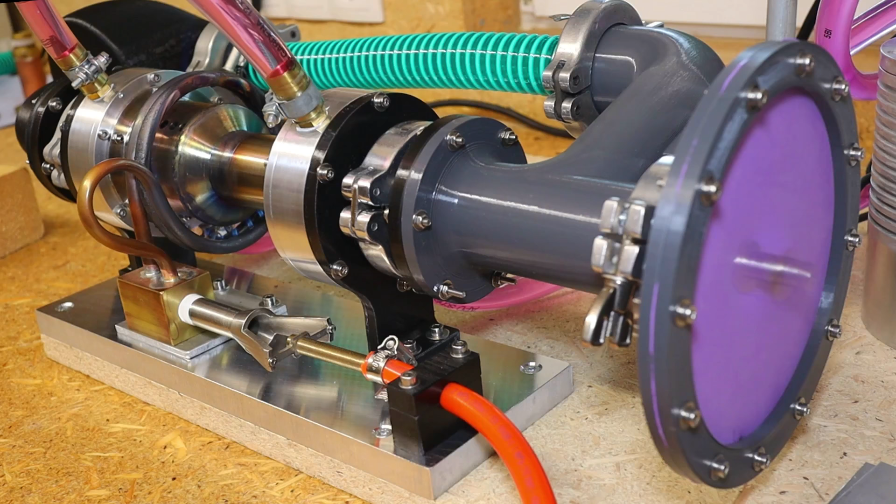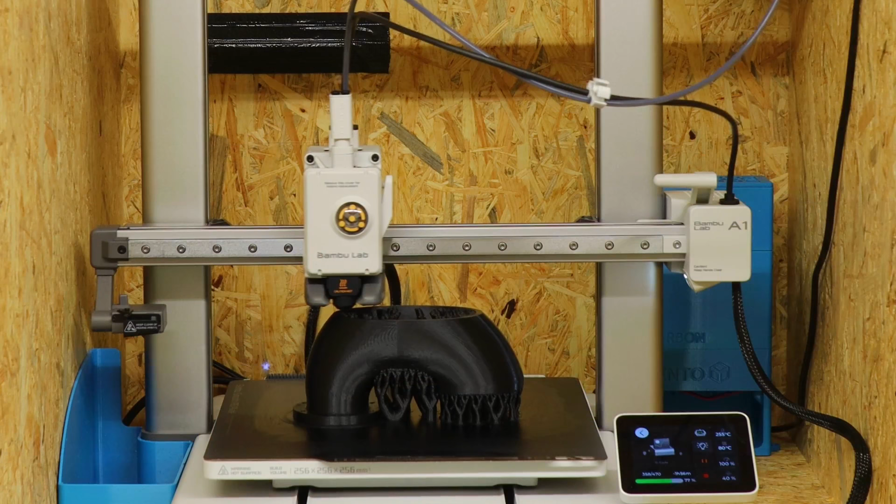The open source thermoacoustic Stirling engine has a very simple design and can use any heat source. It is perfectly suited for generating electricity easily and is designed so that anyone can build it. Almost all parts of the engine can be made with a basic 3D printer.

With this video, I want to make the last remaining metal parts accessible to everyone as well. All blueprints and 3D models are being released immediately as open source downloads. I run the thermoacoustic Stirling with self-produced biogas. This allows me to generate cheap electricity from our organic waste.

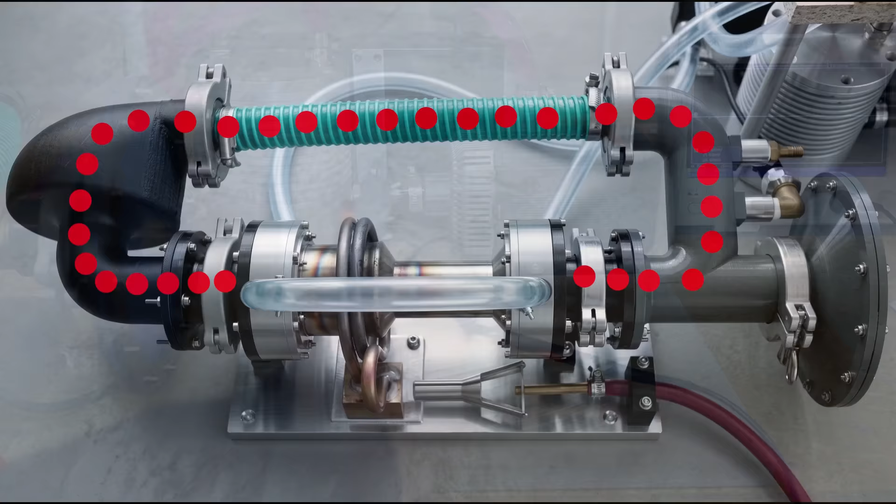The engine consists of the power core, the feedback loop and the power extraction unit. In the power core, the heat input creates an acoustic oscillation. This is amplified in the feedback loop and then converted into electricity in the power extraction unit.

Only the hot section, consisting of the heater, regenerator and thermal buffer tube, cannot be made from plastic. In this video, I want to present a first draft for metal printing and discuss it with you. The final design can then be ordered from a 3D printing service and you just print the rest yourself. I will explain exactly how it works after presenting my design, so you can contribute your hopefully many ideas and improvements.

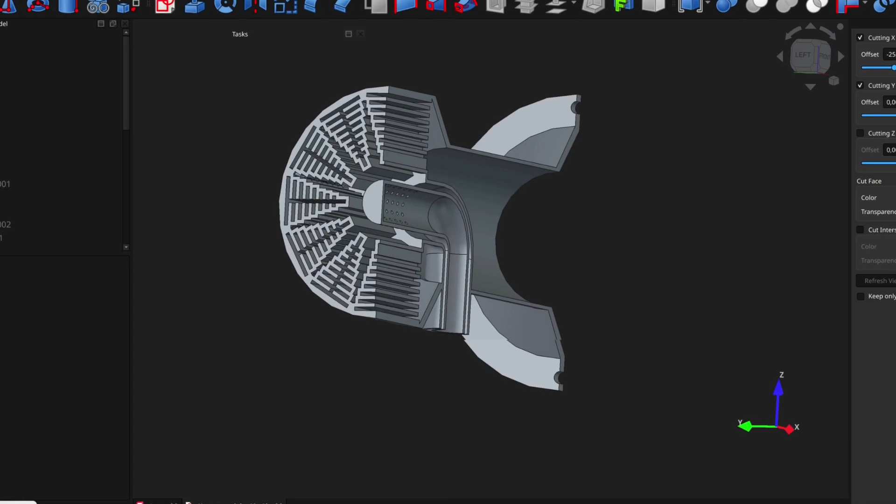The component made up of the regenerator housing, heater and thermal buffer tube is best designed as a single piece to minimize thermal conduction losses. With 3D printing design, you have complete creative freedom, and there are many ways to optimize the heater channels. To minimize heat losses with my biogas operation, it makes sense to integrate the burner inside the heater. This improves efficiency, but it makes the layout of the heater channels, the secondary air supply and the exhaust gas routing more difficult.

Together, the heater channels should have a free flow area of 900 to 1000 square millimeters over a length of 26 millimeters. They need to route into the 60 millimeter diameter of the regenerator housing and the thermal buffer tube without adding too much dead volume or flow resistance. Thin, rectangular slots have a better perimeter to volume ratio than round channels, which is important for maximum heat transfer.

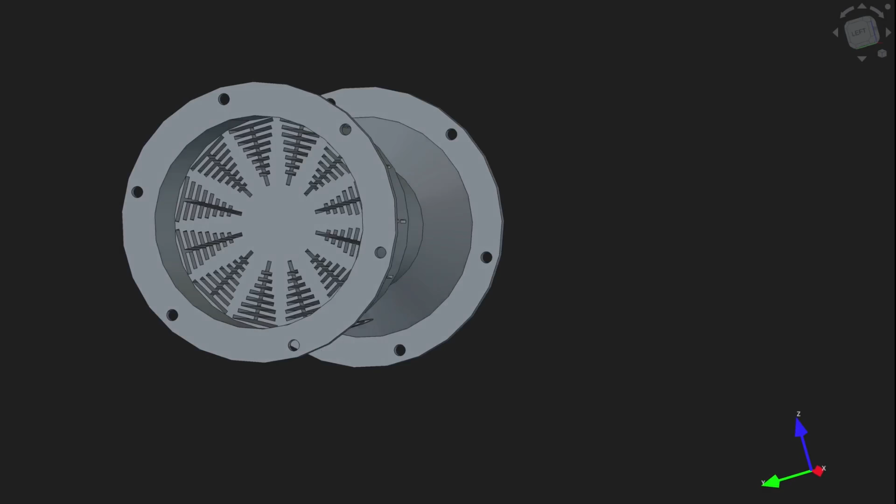I've tested many different geometries and I'm using this design as a draft version for now. You can download the 3D model at ownenergy.org and take a closer look. I'm really looking forward to getting as many creative ideas and improvements from you as possible on how to further optimize the heater geometry. Simple sketches or descriptions are enough. I will then turn them into a 3D CAD model.

Once the final design is ready, I already have a contact at JLC PCB who offered to sponsor a stainless steel prototype. Now, let's go over exactly what tasks each individual section has to perform.

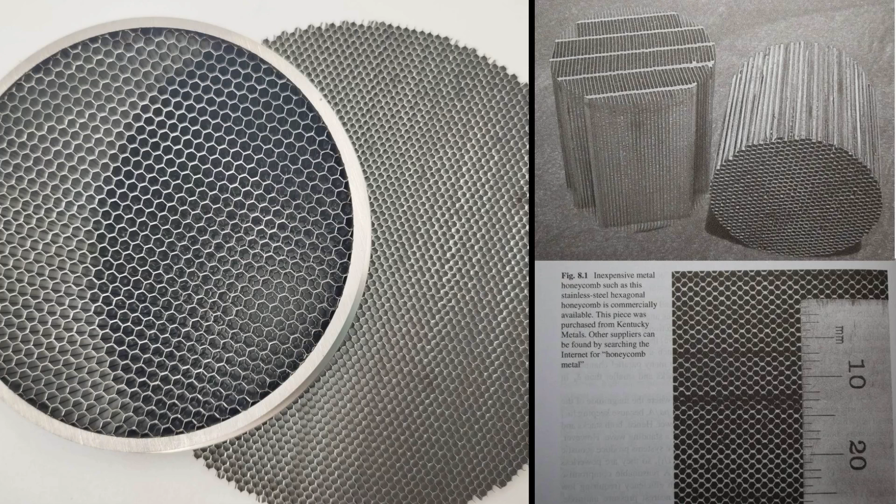The regenerator housing holds the regenerator, which usually consists of a fine wire mesh or many small channels. On one side, it connects to the main cooler, and on the other side, it joins the heater. The regenerator is the most important element in the entire engine. Here, an acoustic traveling wave is generated within a Stirling cycle, which is passed on to the rest of the engine as a standing wave.

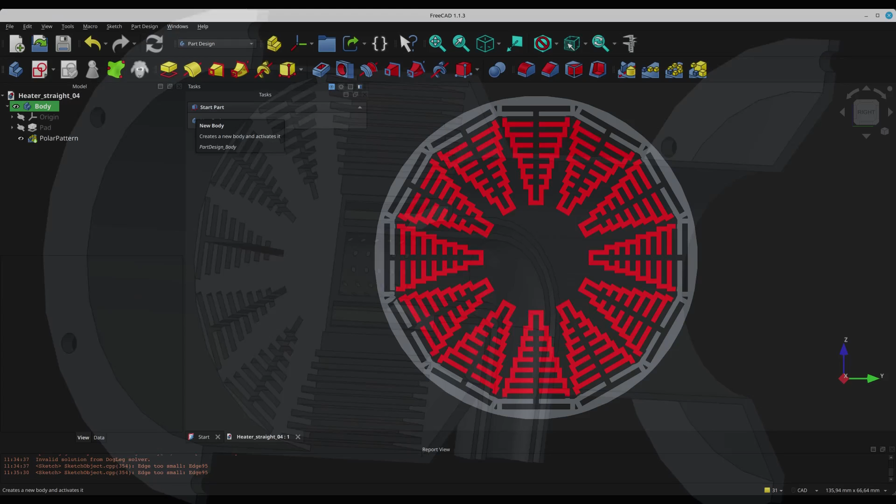The thermal buffer tube essentially just cools the working gas, so that temperatures in the rest of the engine don't get too high. It connects the heater to the secondary cooler, which cools the working gas down even further. The heater's job is to heat the working gas to the highest possible temperature. At the same time, the flow resistance must not become too high, and it needs maximum internal and external heat transfer surfaces.